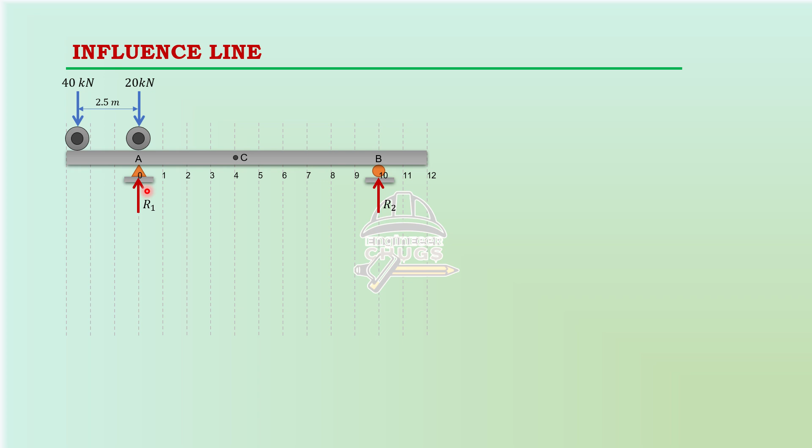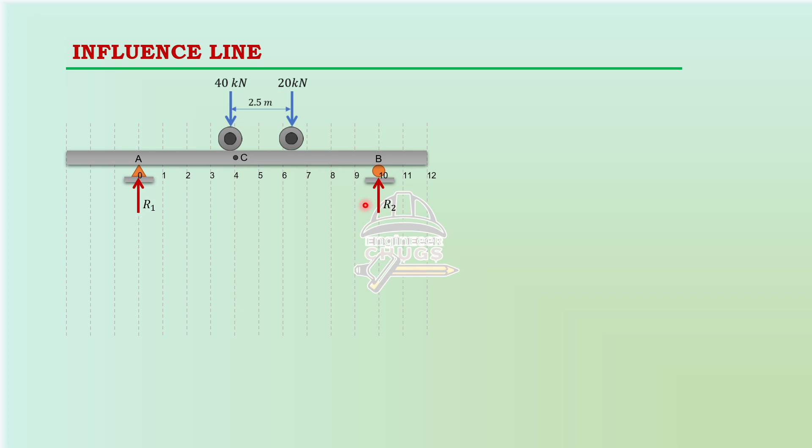So we have 20 and 40 kilonewton loadings for the axle wheels. At saka yung distance nila is 2.5 meters. And then the entire beam is 10 meters yung span nila. Tapos may naka-overhang. Okay, so we are about to find the value of the influence line for the shear at C.

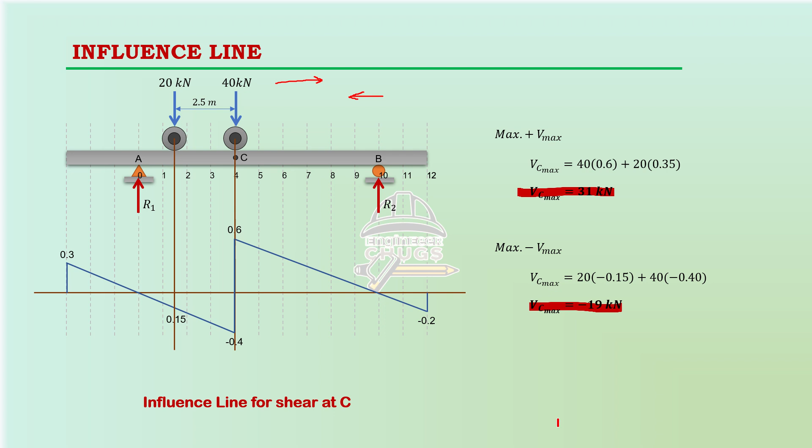Okay, so this would be our final answer for the positive maximum shear and negative maximum shear at C. Yung kagandahan dito sa influence line, pag specific yung tinatanong na point. Okay, how about for the maximum moment?